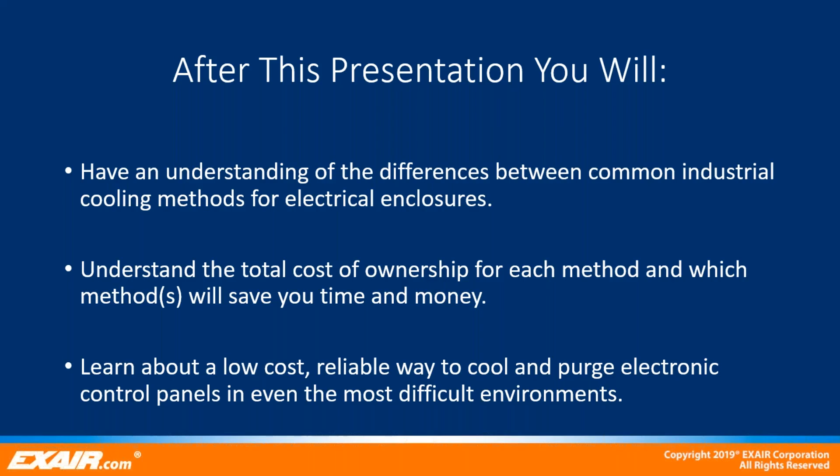Unwanted heat can cause an enclosure's internal temperature to exceed the manufacturer's recommended rating for electrical equipment installed inside. There are two main heat sources that add up to make the total heat load, one being the internal heat sources, such as AC drives, servos, and power supplies. Ironically, the same equipment that can be damaged by it is creating the very own heat.

External heat sources are mainly dictated by the environment in which the enclosure is located. These sources include engine rooms, industrial ovens, and even solar heat, if the enclosure is located outdoors or in direct sunlight. At higher temperatures, the efficiency of equipment decreases. It may cause component damage or failure.

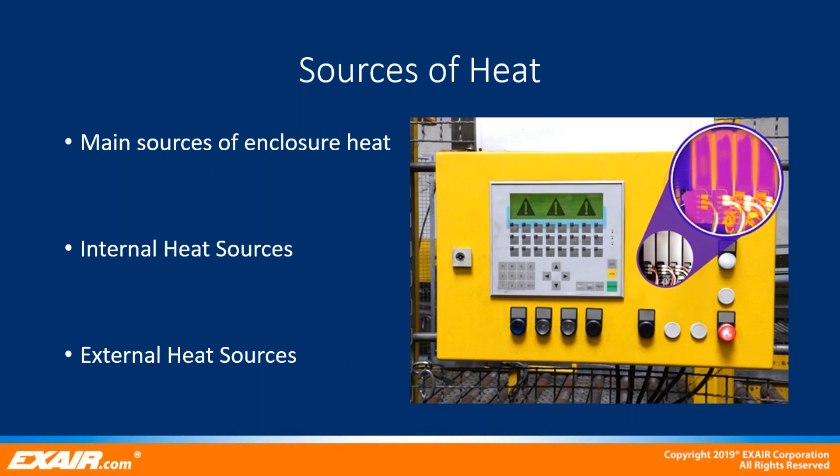For example, a modern VFD typically has an efficiency of 93 to 97%, and is designed to operate below 95 degrees Fahrenheit. For every degree increase above the maximum intended operating temperature, efficiency is derated by 2%, in addition to the risk of equipment failure. It is important to properly match a cabinet cooling solution to your unique application to verify it will properly meet your needs.

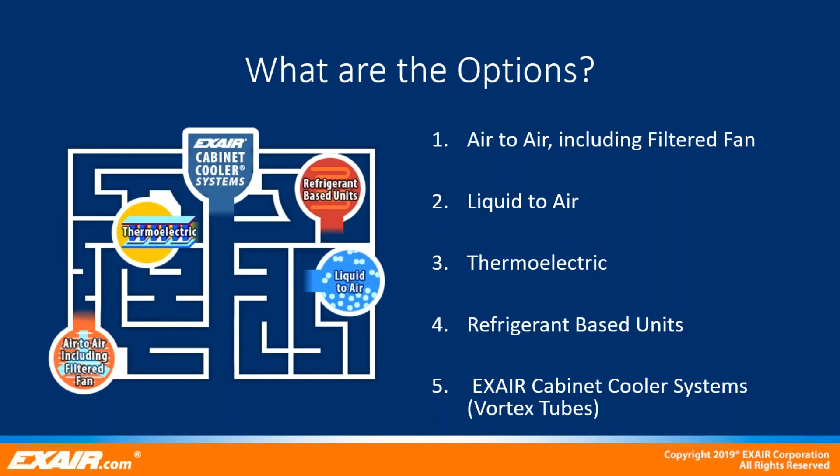During this webinar, we're going to discuss the 5 popular options for electrical cabinet coolers. These options include air-to-air heat exchangers and filtered fans, liquid-to-air heat exchangers, thermoelectric, refrigerant-based (also referred to as compressor-based AC systems), and EXAIR's cabinet cooler systems.

To fully explore our top 5 cabinet cooling options, we're going to focus on these 5 key factors. Initial unit cost: what is the initial unit cost, what does it cost to purchase the product. Installation: how many hours will it take to install. Maintenance: how many hours a year will you spend performing maintenance on the cabinet cooling solution. Operation and performance: how much does the solution cost to operate, considering the electricity usage and/or the compressed air usage, and how well does it perform. And the total cost of ownership: we're going to add all of that up and give you an estimated yearly cost of ownership.

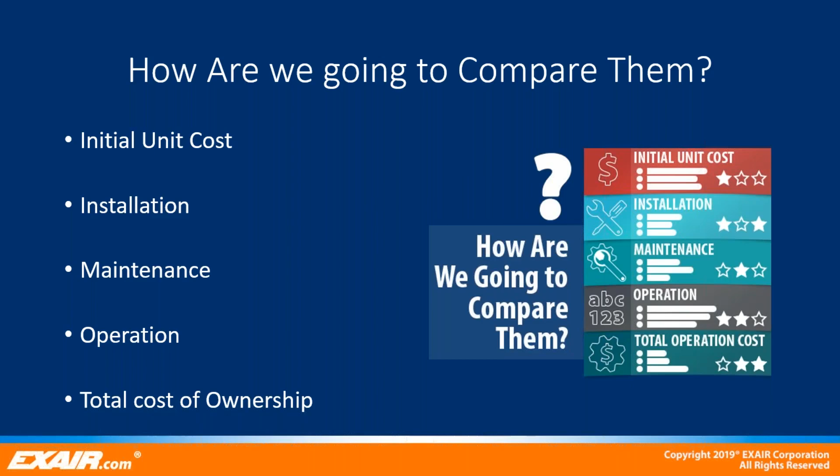The first one we're going to talk about today is air-to-air, including the filtered fans. Heat pipes in an air-to-air heat exchanger cool enclosures by using evaporative cooling to transport thermal energy from one place to another via evaporation and condensation of a coolant. Heat pipes transfer heat through a phase change of a coolant, similar to a compressor-based conditioner, except they have no moving parts other than fans. The lower section of the heat pipe assembly is in contact with the heated air from the electrical enclosure. This heat causes the refrigerant to change phase and vaporize. That vapor then flashes to the top of the pipe, which is in contact with the outside air. When the outside air temp is lower than the enclosure temp, the refrigerant vapor gives up the heat to the outside air and returns to a liquid. The liquid then falls to the bottom and the cycle starts again, as long as there is a negative temperature differential between the inside and outside air.

In layman's terms, air-to-air heat exchangers cannot cool the enclosure lower than the ambient air temp, so the ambient temperature needs to be controlled. And circulation fans are a wear item that can lead to premature failure or cabinet overheating.

Filter fans force ambient air into an enclosure, usually mounted towards the bottom of a cabinet, with an exhaust towards the top to remove the hot air. This is by far the cheapest option for cooling cabinets, but this method can only cool to the temperature of the ambient air as well. Filter fans also have a possibility to blow environmental contaminants inside the cabinet and call for frequent filter cleaning and replacement.

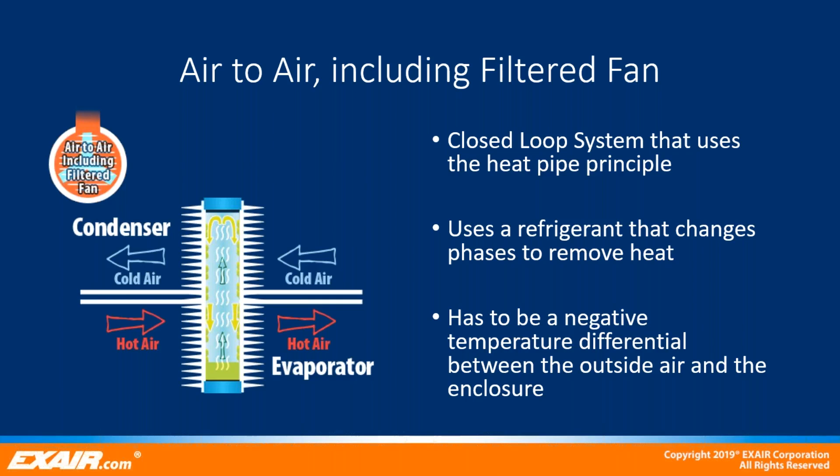So the upfront purchase price of this air-to-air heat exchanger is around $1,450. Spreading that cost over the manufacturer's expected service life of 10 years, we come up with a $145 cost per year. Using 3 hours as the minimum to install and a service rate of $65 an hour, spreading that over the manufacturer's expected service lifetime of 10 years, we come up with $19.50 per year. Using 3 hours as the minimum for yearly maintenance and a service rate of $65 an hour, we have a yearly cost of $195 for maintenance.

The next expense into the total operation is the electricity draw. We calculate that off of the running watts of the product, 5 hours a day, 5 days a week, 9 months a year, at 8.5 cents per kilowatt hour. We come up with a value of $5.51 a year. The total cost of ownership per year coming in at $365.01 per year.

This does not include production downtime for repairs on the product. This will be the cheapest option we talk about today, but considering the limitations on the cooling ability, we consider them the lowest in usability.

Next, we'll talk about liquid to air. Liquid cooling is usually turned to when air-to-air doesn't have the required heat removal. Due to the cooled liquid, liquid to air can get below ambient temperature, unlike air-to-air.

With liquid to air cabinet cooling, the air within the cabinet is cooled by flowing a cold liquid through a heat exchanger and distributing the air within the cabinet via a heat exchanger's fan. The cabinet cooler may receive the cold liquid from facility water or a chiller or another heat exchanger. Water inlet temp is assumed to be 68 degrees Fahrenheit in most cases, so some sort of secondary service is needed to provide that cold liquid.

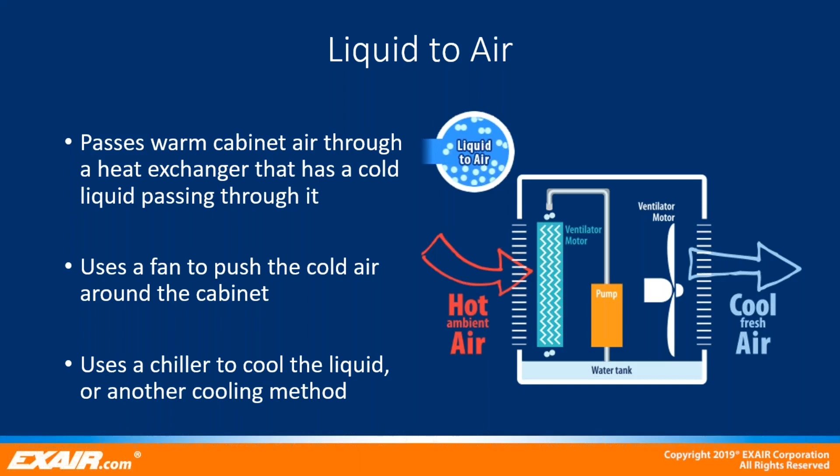Again, we're talking about the cost. The upfront purchase price for this unit was $1,275. Spread that over the manufacturer's expected service lifetime of 10 years, we come up with $127.50 per year. Using 3 hours as the minimum to install and a service rate of 65, spreading that over the manufacturer's expected service lifetime of 10 years, we come up with $19.50. Using 4 hours as the minimum for yearly maintenance and a service rate of $65, we have a yearly cost of $260 per year.

Now to figure out the electricity draw, we're going to calculate that off of the running watts, 5 hours a day, 5 days a week, 9 months a year, at 8.5 cents per kilowatt hour. We come up with a value of $2.75 a year, with a total cost of ownership coming in at $409.75, not including production downtime for repairs.

It's also good to note that the water inlet temp is typically assumed to be 68 degrees Fahrenheit, so water costs are not taken into account, and it's assumed to be a closed loop system with a chiller or some kind of cooling tower. The chiller and cooling tower equipment is also not included in this price.

Thermoelectric. The underlying phenomenon behind thermoelectric cooling system is known as the Peltier effect. This effect is harnessed by using two elements of a semiconductor material upon application of a direct current, DC power source. The device transfers heat from one side to another.

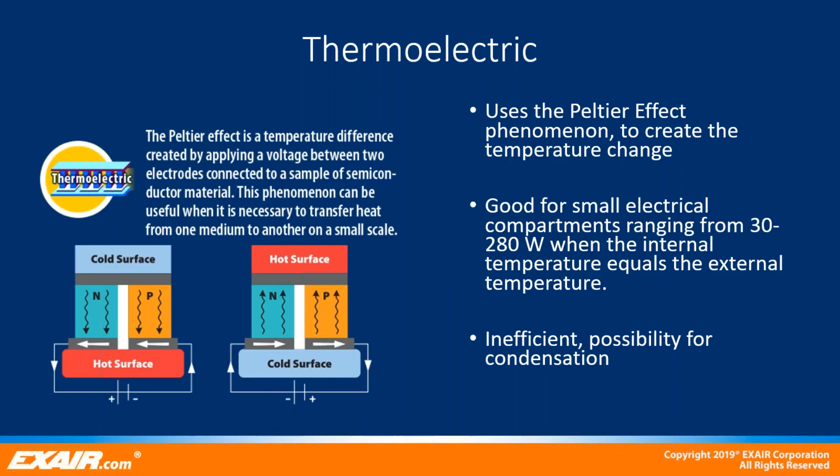The upfront purchase price of this thermoelectric cooler is $4,450. Spreading that over the expected service lifetime of 10 years, we come up with $445 a year. Using 3 hours as the minimum to install, service rate is $65 an hour, and spreading that over the manufacturer's expected service life of 10 years, we come up with $19.50 per year. Using 4 hours as the minimum for yearly maintenance and a service rate of $65 an hour, we have a yearly cost of $260.

Next, going into that total cost is the electricity draw. We calculate that off of running watts, 5 hours a day, 5 days a week, 9 months a year, at 8.5 cents per kilowatt hour, we come up with a value of $190.03 a year. A total cost of ownership coming in at $914.53 a year, not including production downtime for repairs.

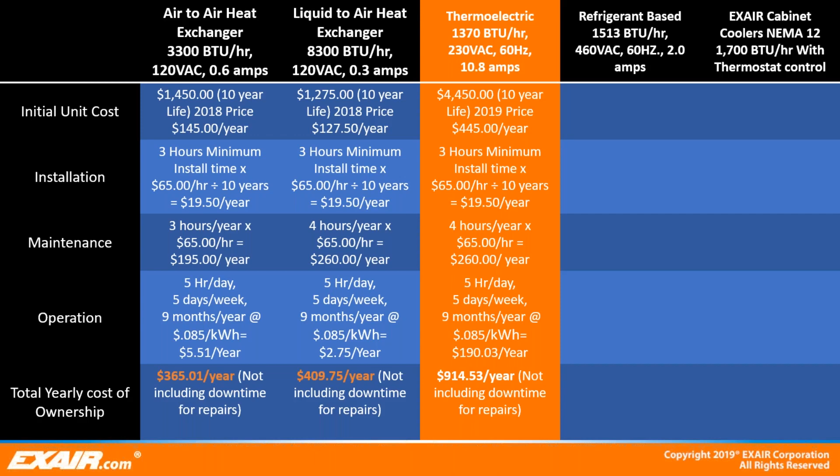Now, refrigerant-based units. All air conditioning systems utilize a specific material that undergoes a phase change process. That material, also known as a refrigerant, is contained within the tubing throughout the air conditioning system. The refrigerant is pulled into the system's compressor in the form of a warm vapor after leaving the evaporator coil. The compressor increases the density of the incoming refrigerant vapor, causing it to increase in pressure and temperature.

This hot, high-pressure vapor then travels to the condenser, where it moves through a series of coils with thin fins attached. A fan blows over the fins, and heat moves from the refrigerant to the fins into the airstream, and then is vented outside of the system.

Now that the vapor has lost a significant amount of heat, it changes phase from a gas to a high-temperature liquid. This liquid is then forced through an expansion valve that causes the liquid to form a mist. The cold mist travels to the evaporator coil, which is then located in the airstream, the circulation fans, which pulls air from within the building.

The air then goes across the cold coils, which pulls heat from the air, causing the air to cool, then circulate around the cabinet. The transfer of heat to the refrigerant causes it to change back into a warm vapor and enters the compressor to begin the cycle again.

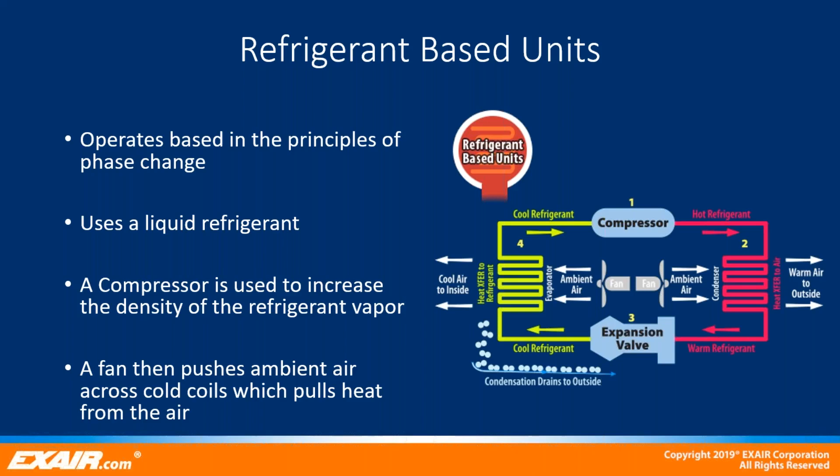Refrigerant cooling systems are capable of higher cooling capacities, but come with much higher maintenance costs due to the amount of moving wear components.

The upfront purchase price of this refrigerant-based unit is $3,290. Spreading that cost over the manufacturer's expected service lifetime of 5 years, we come up with a $658 per year cost. Using 3 hours as the minimum to install, a service rate of 65, spreading that over the 5-year service lifetime, we come up with $39 a year.

Using 6 hours as the minimum for yearly maintenance and a service rate of $65 an hour, we have a yearly cost of $390. The final expense going into the total operation cost is the electricity draw. We calculate that off of running watts, 5 hours a day, 5 days a week, 9 months a year, at 8.5 cents per kilowatt hour, we come up with a value of $70.38 a year. The total cost of ownership per year comes in at $1,157.38 a year, not including downtime in production for repairs.

Now on to EXAIR cabinet coolers. How do cabinet cooler systems work?

Compressed air enters the vortex tube powered cabinet cooler and is converted into two streams, one hot and one cold. Hot air from the vortex tube is muffled and exhausted through the vortex tube exhaust. The cold air is then discharged into the cabinet through the included cold air distribution kit. Then the displaced hot air in the cabinet rises to the exhaust to atmosphere through the cabinet cooler body. The control cabinet is then both cooled and purged with cool, clean air. Outside air is never able to enter the control panel.

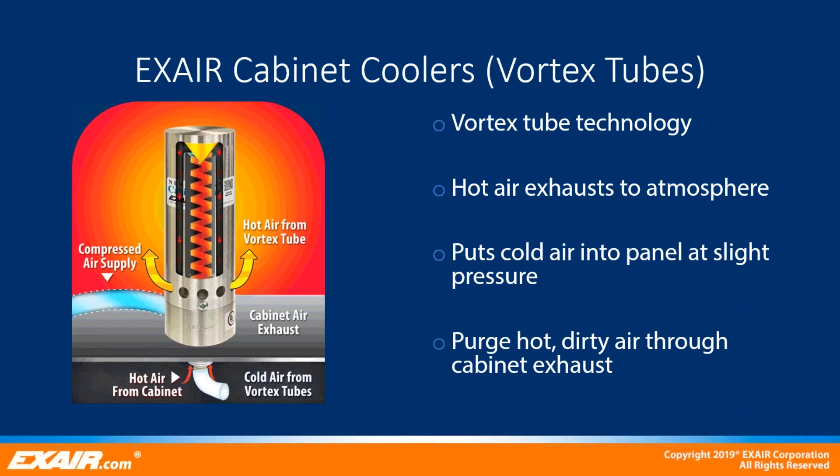The upfront purchase price of this EXAIR cabinet cooler system is $770. Spreading that over the manufacturer's expected service lifetime of 20 years, we come up with $38.50 a year. Using 1 hour as the time to install, the service rate of $65 an hour, spreading that over the expected service lifetime of 20 years, we come up with $3.25 a year.

As long as condensate and particulate-free air is supplied to the EXAIR cabinet cooling system, there are no maintenance needs to keep it running at peak performance. The next expense going into the total operation cost is the electricity draw. We calculate that off of the compressed air usage, 5 hours a day, 5 days a week, 9 months a year. At 25 cents per 1,000 cubic feet of air, we come up with a value of $338 a year, which gives us a total cost of ownership per year coming in at $379.75.

Here's a visual chart to explain the temperature and environmental conditions each of the cooling systems performed best in. EXAIR cabinet coolers exceed BTU per hour characteristics of most. They exceed the maximum operating temperature of most and can withstand the harshest conditions while still producing a very low total operating cost.

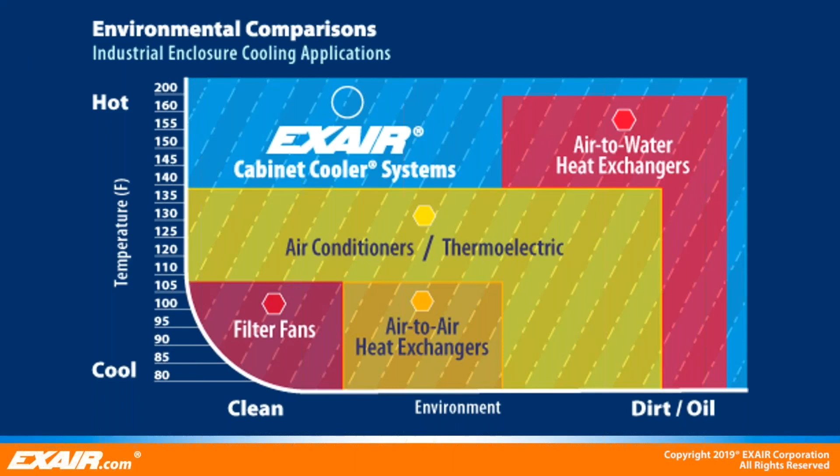EXAIR's compressed air operated cabinet cooling systems are a low cost, reliable way to cool and purge electronic control panels. There are no moving parts to wear out, and no filters to replace, eliminating the need for constant monitoring. NEMA Type 12, 4, and 4X models are available that are very compact and mount in just minutes through an ordinary electrical knockout. Available in a wide variety of cooling capacities, ranging from 275 BTUs per hour for our smallest unit up to 5,600 BTUs per hour for our largest dual system.

Thermostat control systems are the most efficient way to operate a cabinet cooling solution, as they limit compressed air use by operating only when the temperature inside the enclosure approaches critical levels. Continuous operating systems are recommended when constant cooling and constant positive pressure inside of a panel are required. In addition, EXAIR cabinet cooler systems are also UL listed and CE compliant.

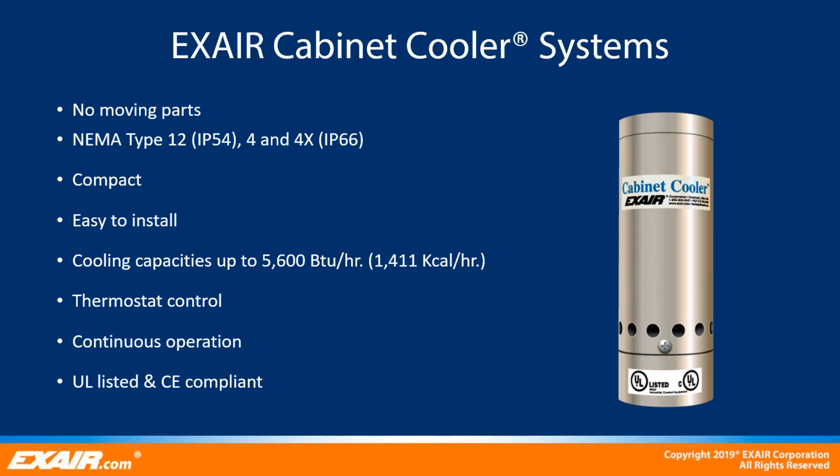Cabinet coolers mount to the enclosure through a drilled hole or a standard electrical knockout. The NEMA Type 12 cabinet coolers may be mounted on the top or the side of the panel, while NEMA 4 and 4X cabinet coolers must be mounted on the top of the panel, or on the side in a vertical position, to maintain their NEMA integrity.

If there is a need to mount a NEMA 4 or 4X cabinet cooler on the side of the cabinet, we do offer a side mount kit to make this possible without impacting the NEMA integrity of the cabinet. You can see that in the right photo.

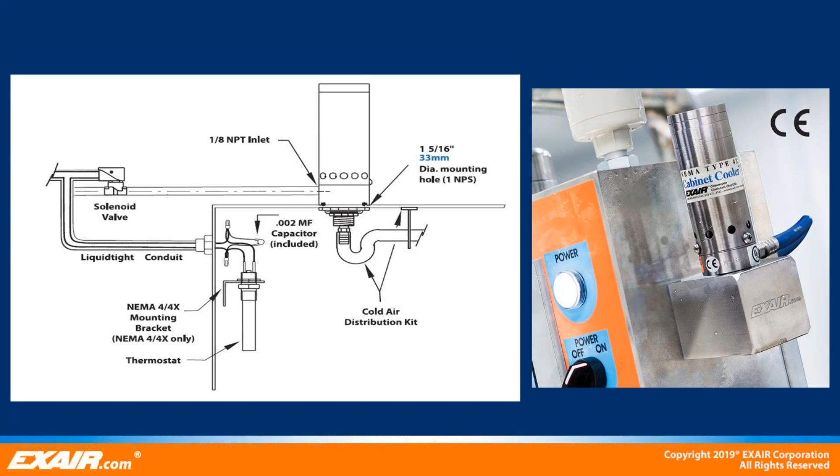Thermostat controlled cabinet cooling systems are the best option when experiencing fluctuating heat loads caused by environmental or seasonal changes. Thermostatically controlled systems include a cabinet cooler, adjustable thermostat, solenoid valve, a cold air distribution kit consisting of tubing, self-adhesive clips to duct the cold air inside the panel, and a filter separator to remove any water and contaminants from the supply.

The adjustable thermostat is a bimetal electromechanical switch, factory set for 95 degrees Fahrenheit. We chose this setting because, as we discussed earlier regarding some of the more common devices found in a panel, like VFDs, this meets the recommended set point by the manufacturer. It will normally hold a plus or minus 2 degrees Fahrenheit temperature inside the cabinet.

It's rated for 120 to 240 volt AC or 24 volt DC. The thermostats are UL recognized and CSA certified. They are not position sensitive, but should be located in a hot area inside the enclosure, through a 7/8 knockout through the enclosure wall or on a bracket inside the panel.

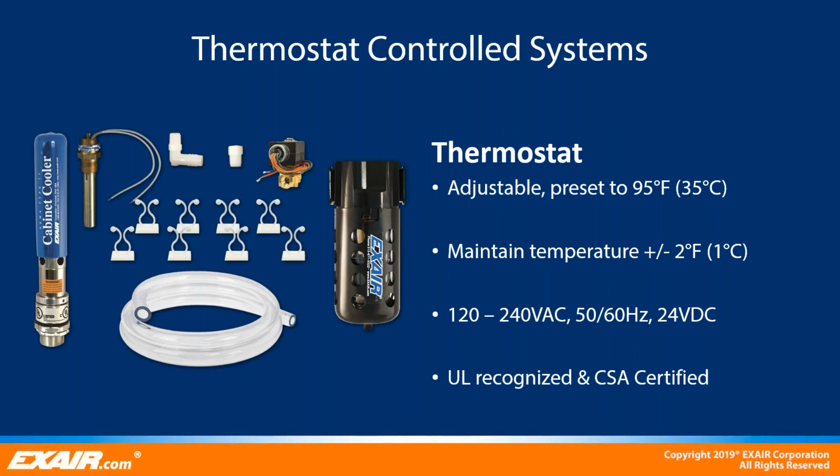We also offer the ETC, or electronic temperature control, providing precise temperature control via a quick response thermocouple. It can accurately maintain a constant temperature that is slightly lower than the maximum temperature rating of the electronics, allowing for just enough cooling without wasting compressed air.

The temperature setting can be easily changed by a simple push of a button, and the temperature is displayed on the LED screen. The control activates the included solenoid valve when the temperature setting is exceeded. The ETC is suitable for NEMA 12, 4, and 4X environments.

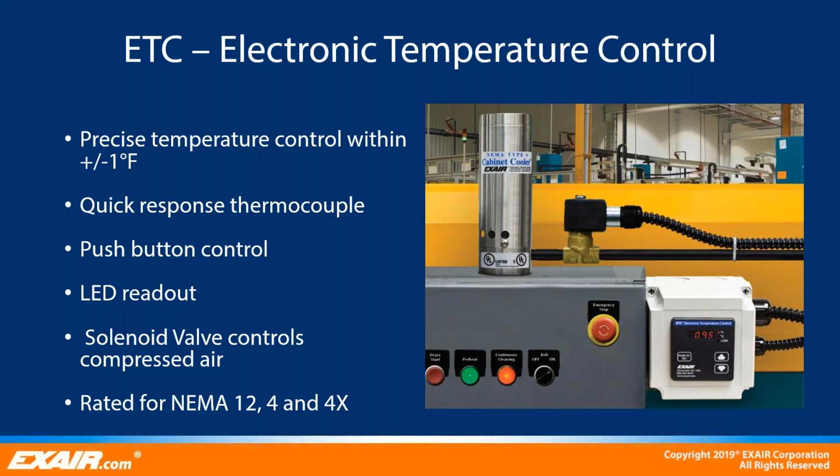EXAIR also offers special cabinet cooling solutions for even the most advanced and complex applications. Better yet, they are all stock items as well.

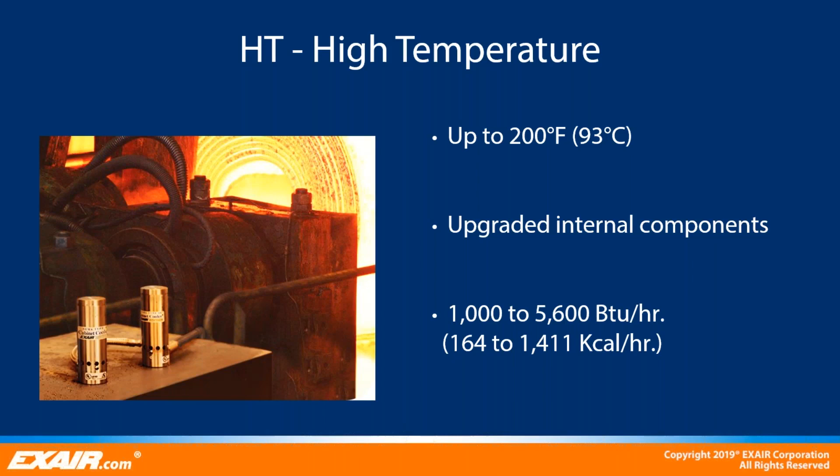Special high temperature cabinet cooling systems are available for areas where ambient temperatures range from 125 degrees Fahrenheit to 200 degrees Fahrenheit. Upgraded internal components are able to withstand higher temperatures, like those near boilers, ovens, furnaces, just to name a few. We offer systems ranging as low as 1,000 BTU per hour up to our largest dual system, providing 5,600 BTU per hour of cooling.

Non-hazardous purge cabinet cooler systems are the preferred choice for areas with high contaminants that may pass through a conduit or small openings in the panel. The non-hazardous purge cabinet cooling systems apply a constant small amount of positive pressure into the enclosure by passing 1 SCFM of air through the cabinet cooler when the solenoid valve is in the closed position.

When the thermostat detects high temperature, the solenoid valve is energized to pass full line pressure and volume to the cabinet cooler, providing the full rated cooling capacity for the system.

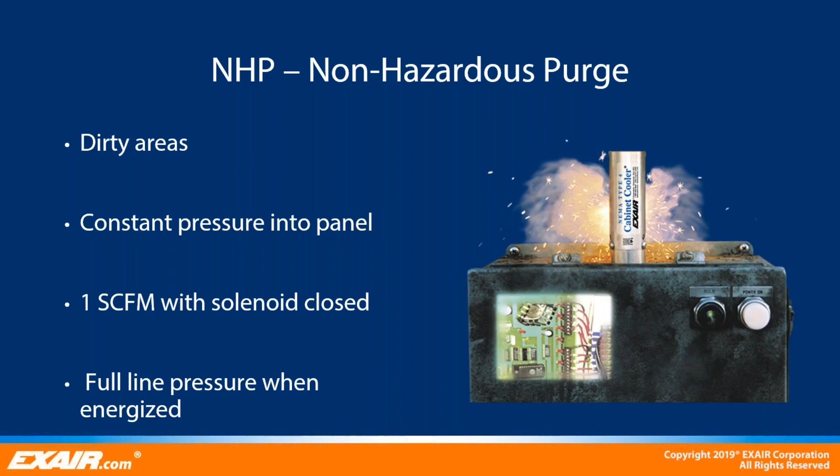EXAIR's hazardous location cabinet coolers are engineered for use with purged electrical enclosures. The HazLoc cabinet coolers are not purge and pressurized control systems and should not be used in place of a purged and pressurized controller. They are meant for use in conjunction with a purged and pressurized control system.

These systems have been approved and tested by UL for use in the following areas: Class 1 Div 1, groups A, B, C, and D. Class 1 typically refers to the presence of a flammable gas or vapors in quantities sufficient to produce an explosion or ignitable mixtures.

Class 2 Div 1, groups E, F, and G. Class 2 areas are locations in which combustibles may exist. The end user shall avoid installation of the device in a Class 2 environment where dust may be readily disturbed by the exhaust of the cabinet cooler. Any dust formed in the vicinity of the cooler must be cleaned regularly.

And Class 3. Class 3 areas are locations that will have ignitable fibers or filings present, very common in the textile industry. The cabinet cooler also carries a temperature rating of T3C, meaning it cannot be installed near any materials that could auto-ignite at temperatures in excess of 320 degrees Fahrenheit.

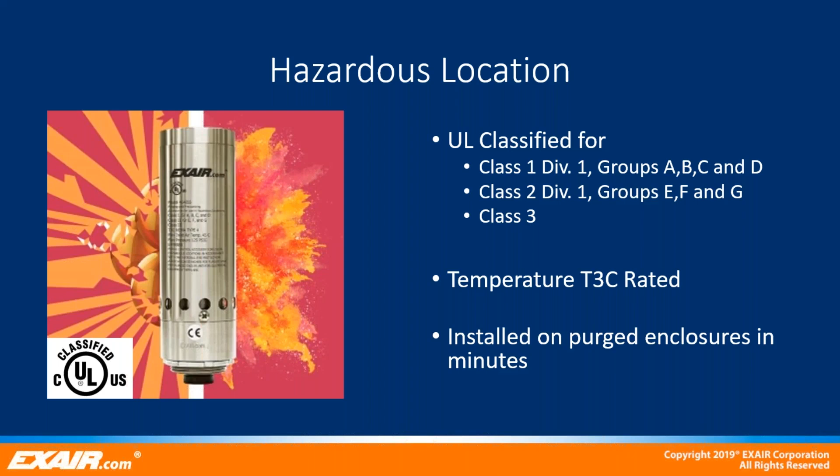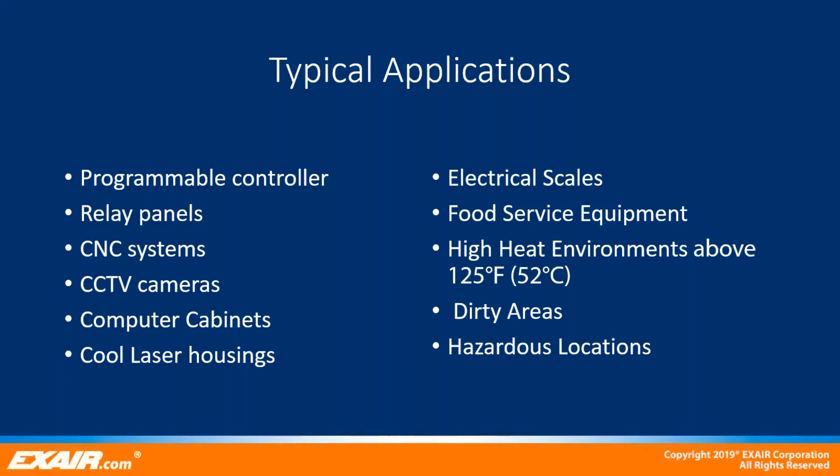Where should you look to install a cabinet cooling system from EXAIR? Here are a few common applications where our cabinet cooling systems can help solve heat-related issues: programmable controllers, relay panels, CNC systems, computer cabinets, laser housings, electrical scales, high heat environments, dirty areas, and even hazardous locations, just to name a few.

Why should you consider a cabinet cooler system over another method of cooling? Well, the advantages are pretty clear. They're low cost, compact, quiet, they install in minutes, and they can maintain your NEMA 12, 4, and 4X cabinet rating. They stabilize temperature and humidity, and have no moving parts, so they're maintenance free.

They eliminate any safety concerns or OSHA violations. They mount in standard electrical knockouts. They stop nuisance tripping, stop heat damage, eliminate fans and filters, eliminate lost production, stop dirt contamination, and provide washdown protection.

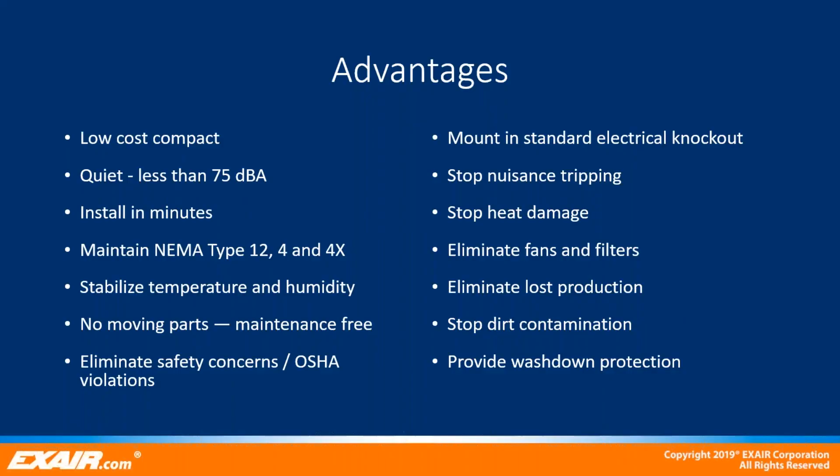Heat within an electrical cabinet can be a major issue for manufacturing companies. The costs associated with downtime and repairs on sensitive electronics that fail due to heat and environmental contaminants is an unnecessary burden. Today we have talked about various methods used in industry to dissipate heat loads within an electrical cabinet, but here at EXAIR we designed a solution that will work in every environment and save you time and money.

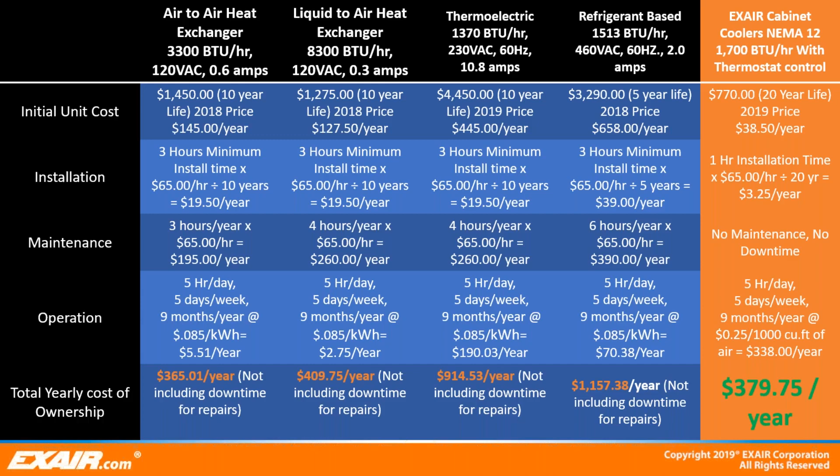Now, selecting the proper cabinet cooling system can be simplified by using our cabinet cooler sizing guide. The sizing guide collects all the pertinent information needed for an EXAIR application engineer to determine the heat load that will be needed to dissipate, and ensure the most efficient cooler is chosen and the proper NEMA rating is selected to fit your particular requirement.